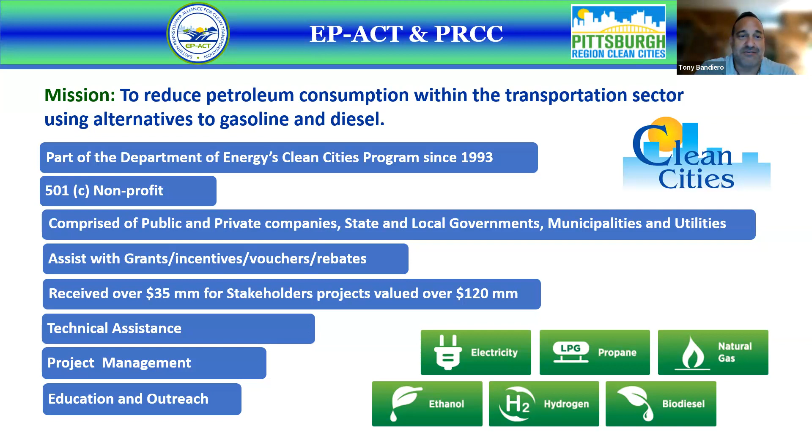We also do project management. Like I said, since I've started, we've probably been involved in over 50 or 60 projects, and Rick probably the same. So we do a lot of project management. And then of course, why we're here today, education outreach is a big part of what we do. We're both 501c3 nonprofits. We don't sell fuel, we don't sell vehicles, we don't build stations, we don't do any of that. But what we're really good at is putting this stuff together.

Tony, I'm going to make you the host, and you can go ahead and run that video for us. All right, let's see if we can do this. Share screen. Oh, I'm sorry. Let's try this again. Share screen. There we go. Okay. You hear it? Yes. There you go.

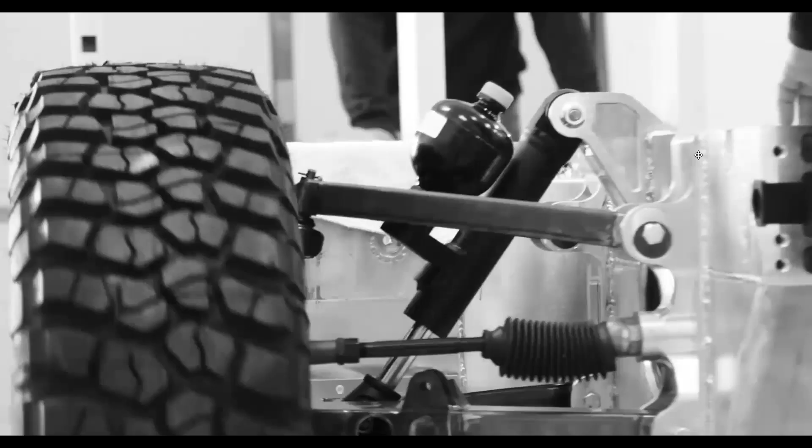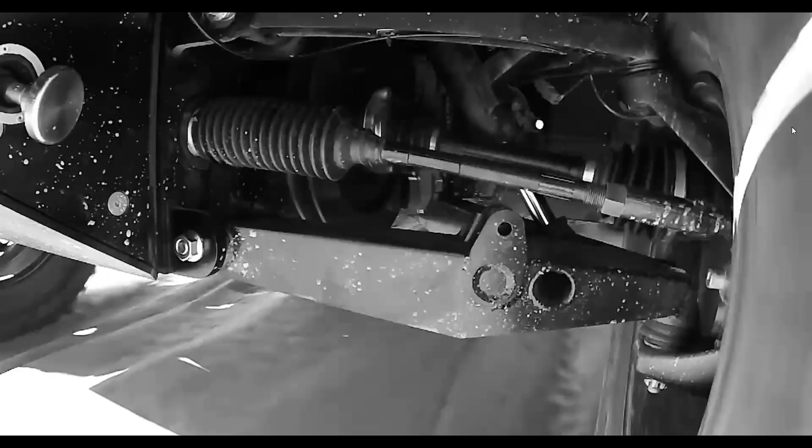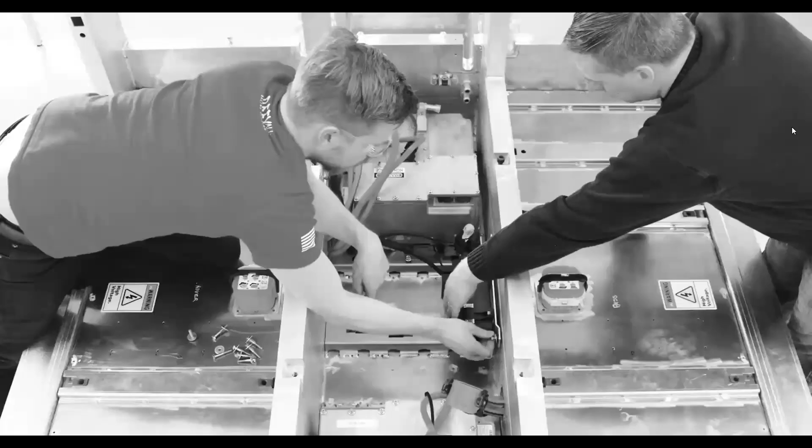In 2015, with a handful of off-road savvy engineers, Robert Bollinger put his dream into motion, designing and building the first ever Class 3 electric sport utility truck in existence, the Bollinger B1. With a timeless, flat-paneled utilitarian appearance, the B1 boasted never-before-seen features such as 15-inch ground clearance, 10-inch wheel travel, patented pass-through allowing 13-foot storage, and more. Designed and built from the ground up, the dual-motor all-electric drivetrain with portal gear hubs was the first of its kind. Even the battery pack was designed in-house to meet the specific needs of an off-road capable Class 3 truck.

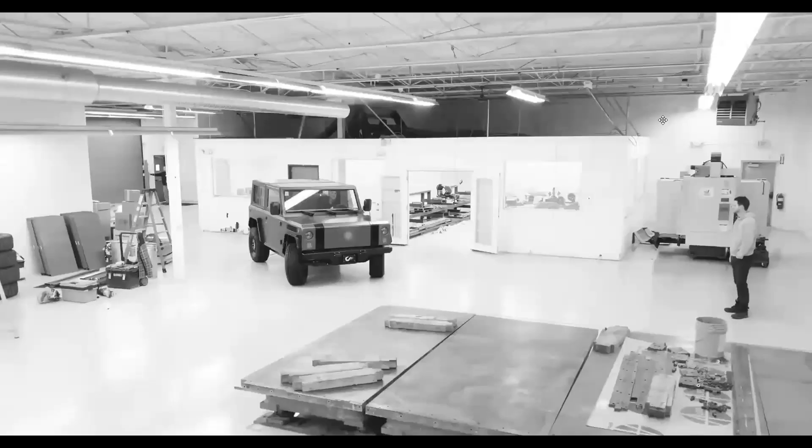The 2017 debut was quickly followed with a ton of press and nearly 50,000 reservations within a few months. Next, the team pounded the B1 in Colorado and Utah to test its capabilities on some of the toughest trails in the world, and it cleaned up well for the LA Auto Show. In 2018, Bollinger Motors moved to Detroit to grow the team, be closer to the automotive industry, and further the development of the B1.

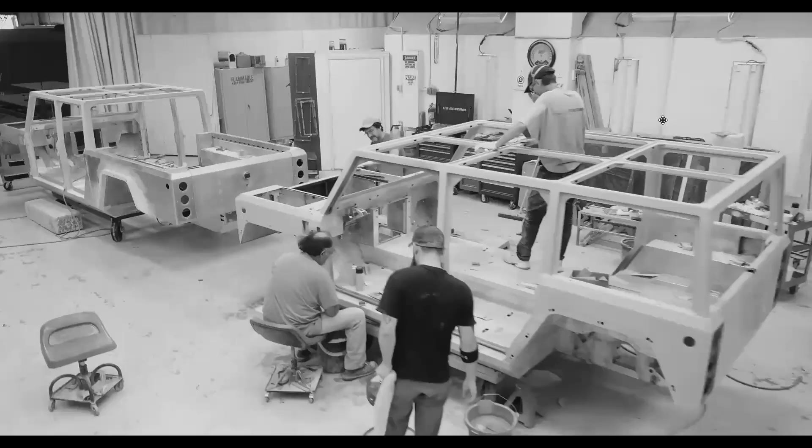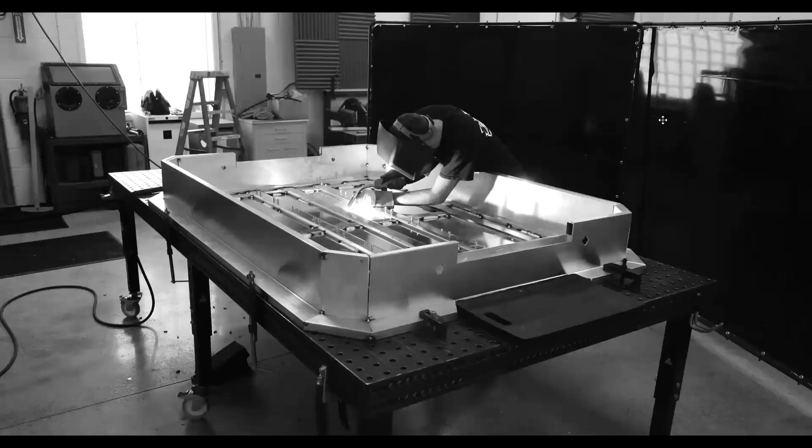By 2019, they had designed and built the second-generation trucks, the 4-door B1 SUV and the 4-door B2 pickup truck. The team continued to develop their own batteries, creating a more powerful and efficient second-generation pack. Months and months of testing followed. The new prototypes strengthened the unstoppability of Bollinger Motors. Every component, every material, and every wire was refined as they moved closer to production.

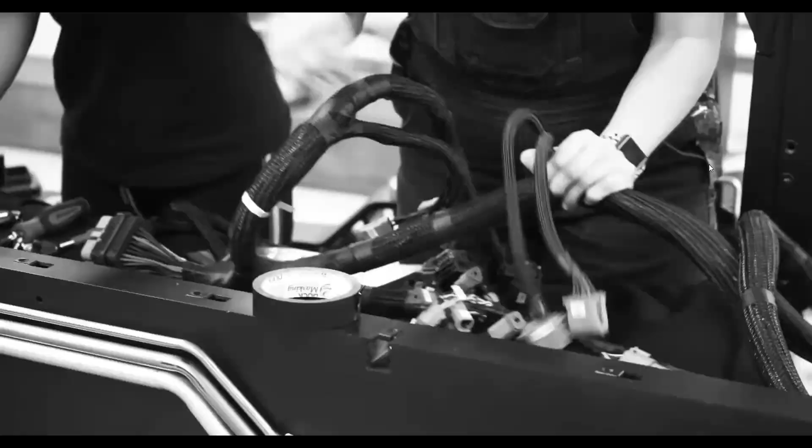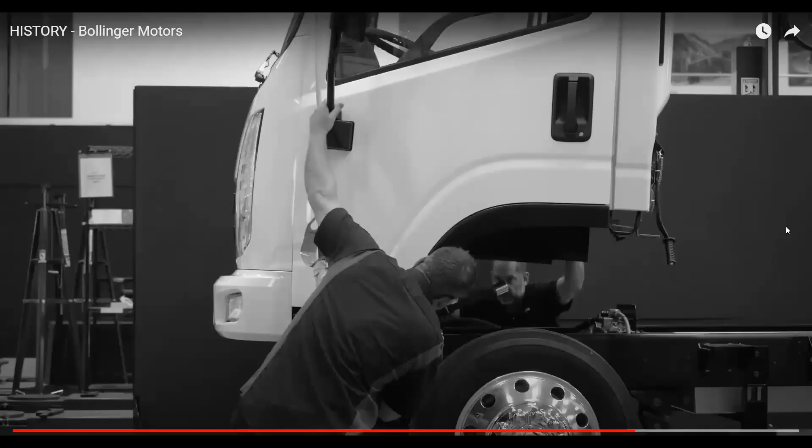After 6 years developing battery packs, drivetrains, thermal and control software, the commercial industry took notice. In early 2022, Bollinger Motors pivoted directions to focus on the commercial truck industry, developing their Class 4 through 6 electric chassis cabs. The years of research and development in the off-road EV truck space put them ahead of the game as their battery and drivetrain technology adapted to their fleet applications.

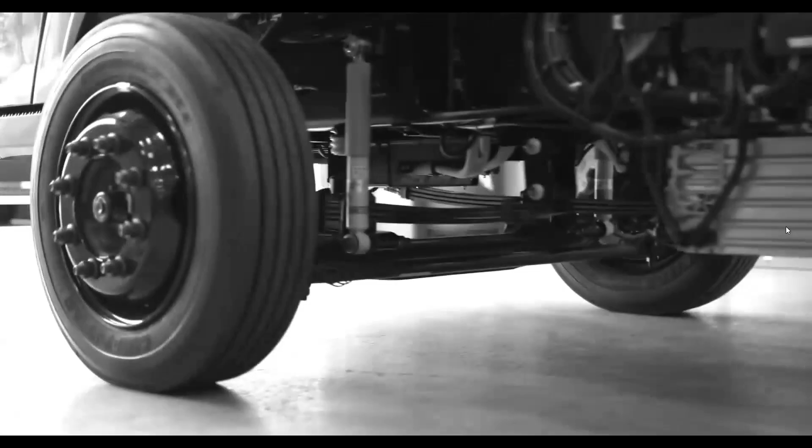In early 2023, the first Bollinger B4 prototypes were driven and tested, paving the way for production vehicles being available in mid to late 2024.

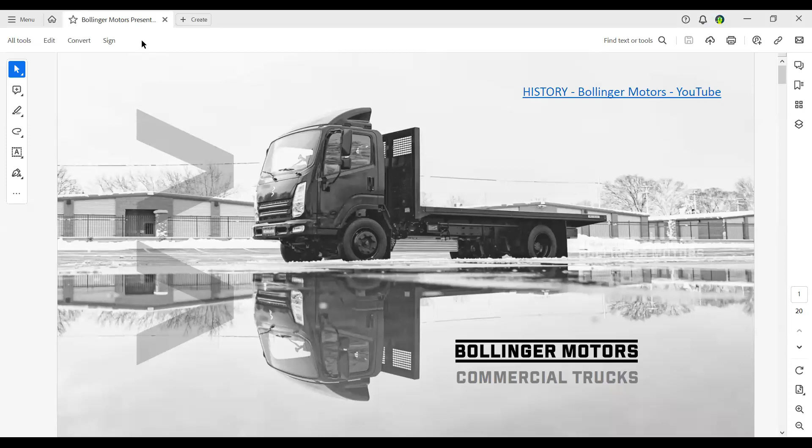Tony's on mute. Can you share your screen now, Steve? Can't see anything. Did you give me hosting? No, Tony, you're still the host. All right. I can reclaim it, Tony. Hold on. Yeah, reclaim it. All right, I reclaimed it. Steve, I'm going to make you the host. Okay. You're good. Where is it? Okay, hang on just a second. Gotta find it. Okay, if not, I can run it. Hang on. I should have it now. All right, is it sharing now? No, not yet. I do not know why it's not coming up. All right, let me reclaim it. I'll bring it up. Okay. Let's see here. Oh, I got it now. You got it? Yep. All right, let me know if you see it. Yep. Are you the host? I'm the host. Okay, go ahead.

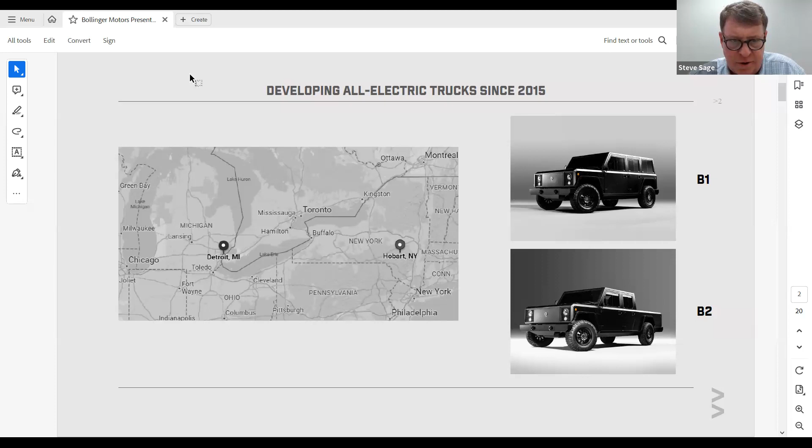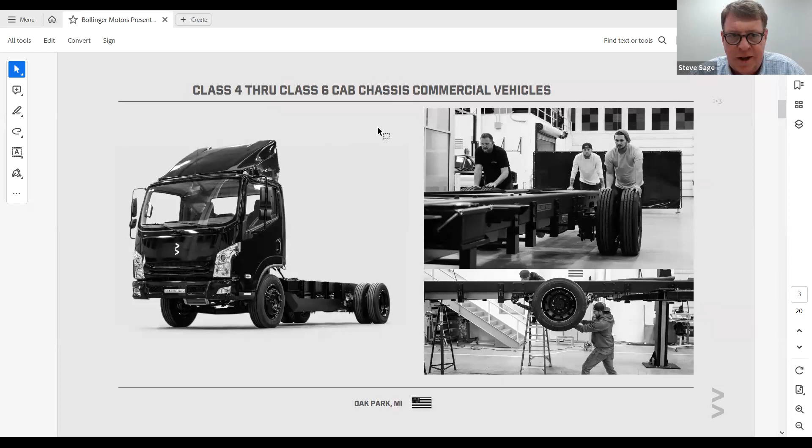And then it was in 2021 and then 2022 when the Inflation Reduction Act was passed. Our company literally pivoted overnight. I was here and we put the SUV and pickup truck on hold and are solely devoted to commercial vehicles in the class 4 through class 6 space. The first offering we'll bring to market will be a class 4 cab and chassis.

It'll come in one configuration, 158-inch wheelbase, 136 cab to axle, GVWR rating of 15,995, and a little over 7,000 pounds of payload available. All these vehicles will come with 2 battery packs, and that will deliver a range of 185 miles. On a level 2 charge, it's just under 5 hours. And then on a level 3 charge, the fast charge, it's a little over 1 hour.

The next product we will bring to market, and I'll take you through some production milestones here a little later in the presentation, will be a class 5, GVW of 19.5 and payload of 11.3. Same 2 battery pack configurations, so the charging times are the same. But the range is a little less, 160 miles, due to the increased weight.

So we chose to do a low cab forward configuration for 3 reasons. First, obviously, the additional cargo space that can be applied to the application on the back. Secondly, the increased forward visibility that we're going to couple with a backup camera and backup alarm, so that we think will generate driver confidence in these vehicles.

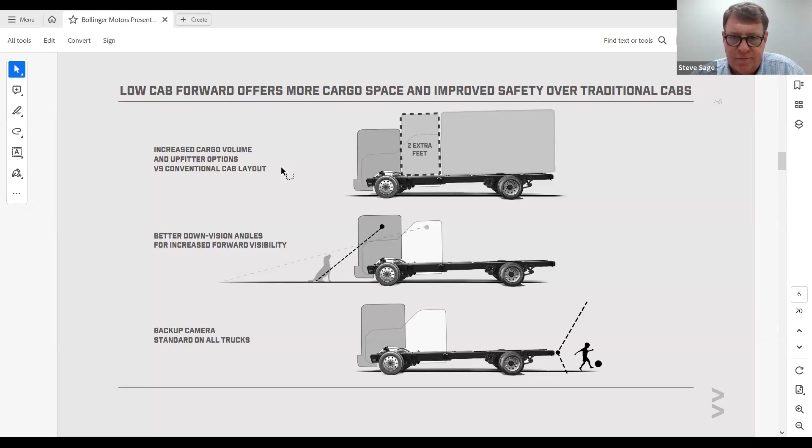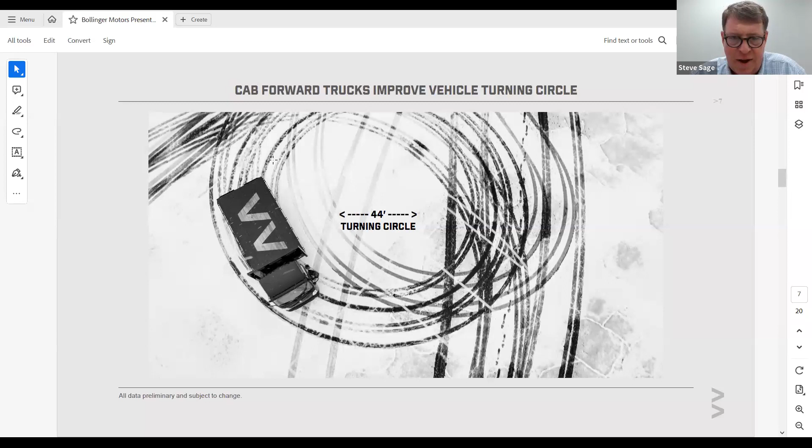And the third reason is the very impressive turning circle for both urban and suburban application on these vehicles. Only a 44-foot turning circle on the class 4 vehicle. The class 5 with the additional increase in wheelbase will have a 48-foot turning circle.

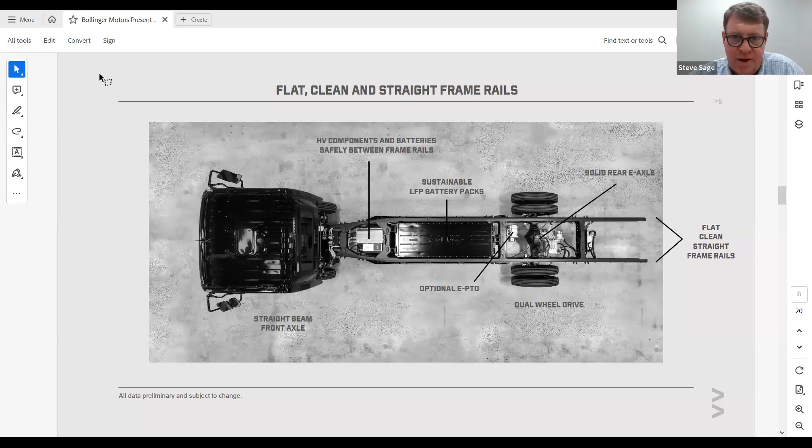And we did that because during the development of the vehicle, we went to every bodybuilder and said, all right, here's our CAD drawings. Can you put applications on the back of it? Because we wanted to make sure if we were going to do the increased width of the frame, that it would be sustainable then for them. Every one of them came back with very positive results. So we can get anything on the back of this vehicle.

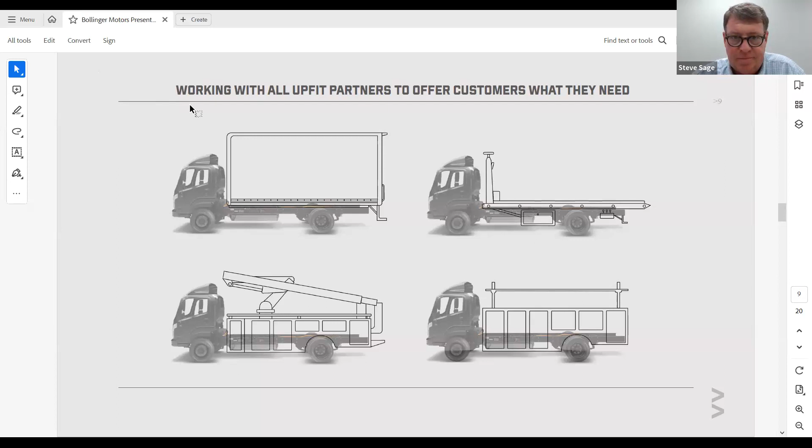We chose Roush here locally as our manufacturing partner. They are literally 15 miles from our headquarters. They're renowned for their work with the major OEMs here. They're the company that converts the Ford vehicles into the Raptor versions, et cetera. They're heavily involved in racing as well.

Our second supplier, also local, ONE, Our Next Energy, is our battery provider. So where you saw that the company itself developed its own batteries on the SUV and pickup, we have now converted our battery needs and requirements to this company. They are completing a 1.6 billion federally funded manufacturing facility right outside of the Detroit airport.

They also use a different battery chemistry than some of the other battery makers. It's a lithium iron phosphate, so it's much more sustainable in that there's no nickel, no cobalt, it doesn't catch on fire, etc. And they've also given us assurances that you can charge this battery from 0 to 100 on 3,000 cycles. So with that confidence, we chose to warrant the battery for 8 years and 100,000 miles. This company as well is only 25 miles from our headquarters.

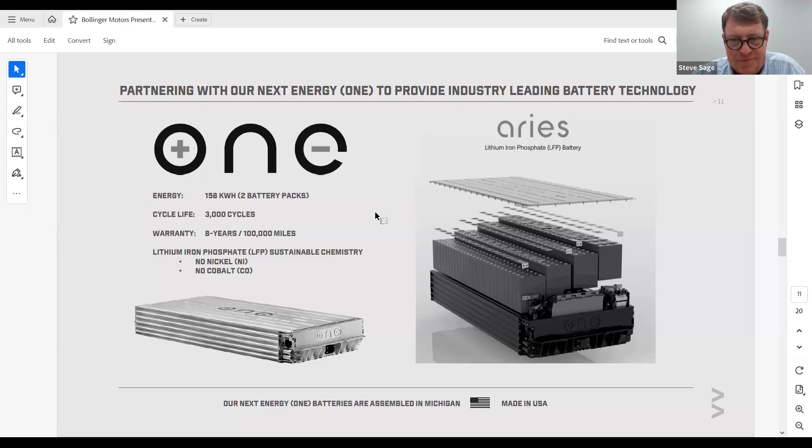Two other local or U.S. partners as well. Dana provides our e-axle. They are basically the founders of the e-axle application, and the one that we're going to put into our vehicle is rated for a Class 6 vehicle, but we're going to put it in every version, the Class 4 and Class 5. Produces 323 horsepower and 675 foot-pounds of torque.

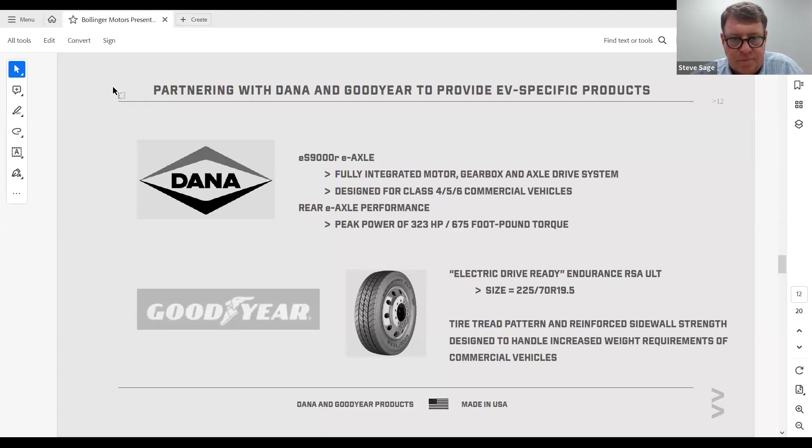So with that torque level, we had to go to Goodyear and say, okay, we need an electric vehicle commercial tire to support this torque rating. So they came back to us with one with a different tread pattern that will absorb the torque, as well as they strengthened the sidewalls to handle all that increased weight that'll be on the back of the vehicle. So this gives you a really good snapshot of our major suppliers within our supply chain and the confidence we have of maintaining production.

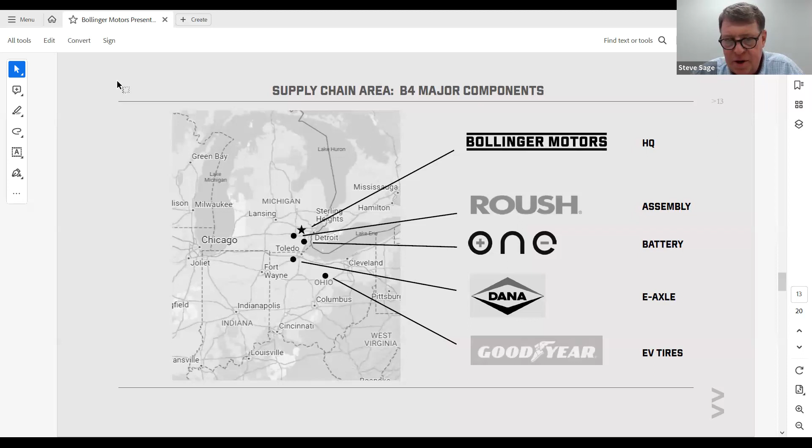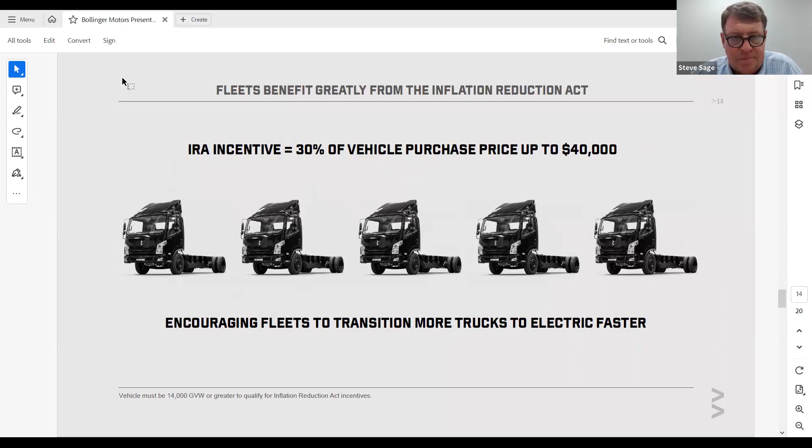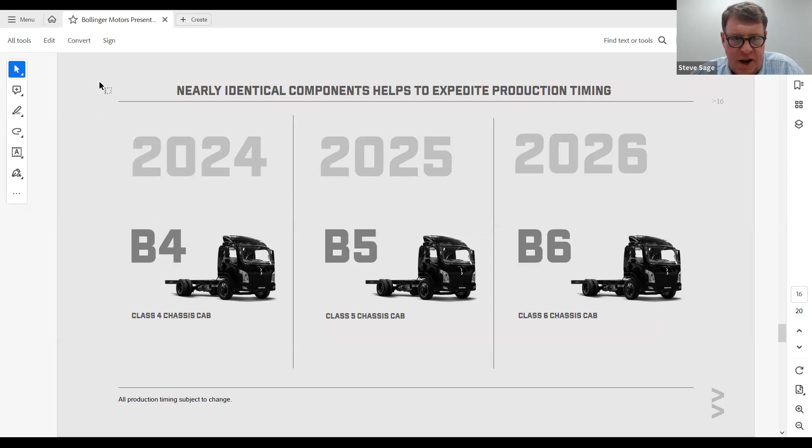Our production is basically going to flow with each of the models over the 2024 to 2026 calendar years. And I'll show you a little bit more detail to that. So we're currently in the design validation build right now. And we're upfitting all of those vehicles. We're building 25 of those. So those will be continued testing, but those will also be out on customer drive experience events.

And by the end of this year, we'll start building what we call process validation. Those vehicles I could actually certify, put VIN plates on, offer for demo programs with certain customers. We'll go into start of production in April. And at the same time, off the same line, due to the commonality of parts, we'll be able to start building the design validation on the Class 5 vehicle. It will then follow the same cadence. We'll go quickly within a few months into process validation, and then start of production for the B5 will be the start of 2025. And then you can see the progression as we move into the Class 6 truck.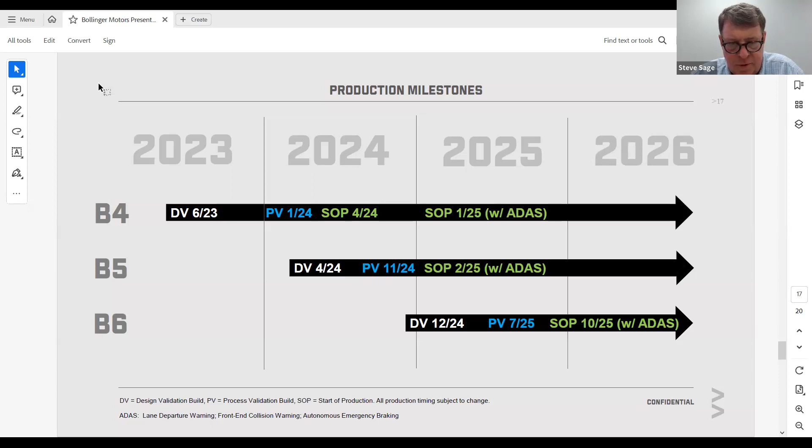All right, so one of the customer events that is upcoming, in case anyone in the membership there is able to attend: we rented out what's called M City on the campus of University of Michigan. It was built for autonomous vehicle testing. So we rented out this test track that has both highway and urban city driving experience. And of the 2 weeks, we do have 4 days left where we still have some reservations available to drive.

We'll have 5 upfitted vehicles out there with different bodies: box truck, service body, stake bed, flatbed, and you can drive them all. If anyone is interested, I'd ask you to reach out to any one of us here. I've provided our contact information for the commercial sales team. So you can reach out to any one of us and we'll be able to get you slotted in to the M City event.

If you're unable to make it over to Ann Arbor, we will be participating in the Odyssey Day celebration there at the Allegheny County Community College in October. I think it's October 6th. Is that right, Rick? That's correct. It's October 6th. Right. And Steve, that'll be the class 4, right? Correct. We'll be bringing the B4. Correct.

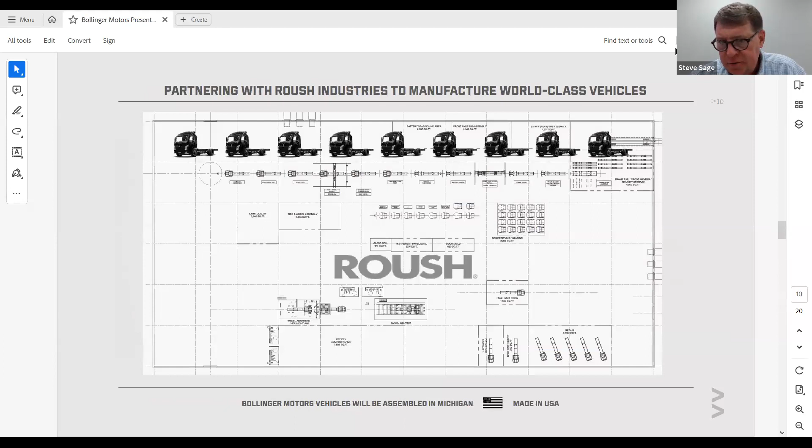So let me go back to it. So on the level 2 connector, Steve, what are you using on your DC fast? Is it CCS? Right now it's CCS, but we're going to have the universal one available as well. I mean, the whole industry's going that way. Since Ford and GM announced that they're adopting Tesla, we're following suit.

Yeah, I'm looking at the chat again, and I don't know if this question's for you or for us. Have you ever interacted with the first responder community? LFP battery is an interesting choice. Wonder what reactions are from first responders. We haven't actually put them on a panel to talk about it, but that's something we will definitely consider.

Yeah. We were just impressed with obviously the safety of the chemistry, but this company ONE was the first to actually go to Tesla and say, hey, can we test our battery in your car? And they doubled the range on the Tesla. In fact, they now have a joint venture with BMW, and I think you're going to see an SUV that comes out with 600 miles of range on these same batteries that we're using in the truck.